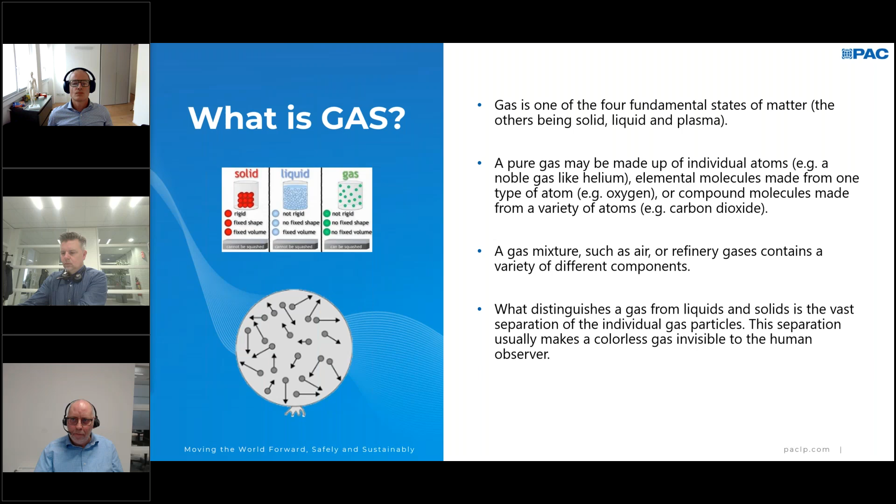So that's a bit of what a gas is, one of the fundamental states of matter where the molecules move around wide from each other in a kind of chaotic way. If we look to our industry, which we call the hydrocarbon processing industry, I have divided them in 3 types: one being natural gas, one being refinery gas from different processes, and then the petrochemical gases from petrochemical sites.

If we look at natural gas, that is mainly methane with lower concentrations of the other alkanes in there, and maybe some low concentrations of nitrogen or carbon dioxide. What is good to know about natural gas compared to the other gases is that it does not contain olefins, it does not contain unsaturated components, because olefins are made when you treat products, when you crack products. In the natural gas part, there is also the condensate, which is something in between gas and a crude oil, going up to carbon number C36 or something like that.

If we go to the refinery processes, well, you can imagine that there are a lot of different gases floating around in the refinery, and the composition may vary, from fuel gas having different components like hydrogen in there, or the hydrocarbons and so on. A typical gas, not really a gas, but liquefied petroleum gas, LPG, is a mixture of propane and butane, which are by itself gas, but if you put them in a container and increase pressure, they become liquid.

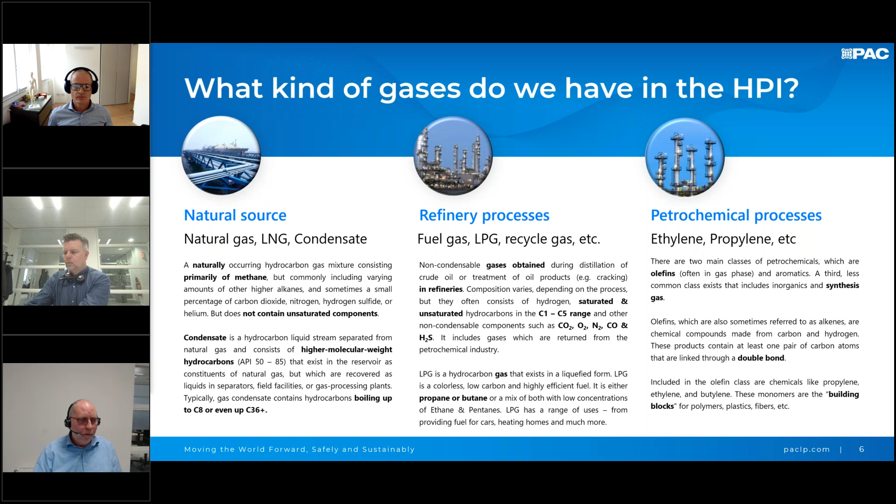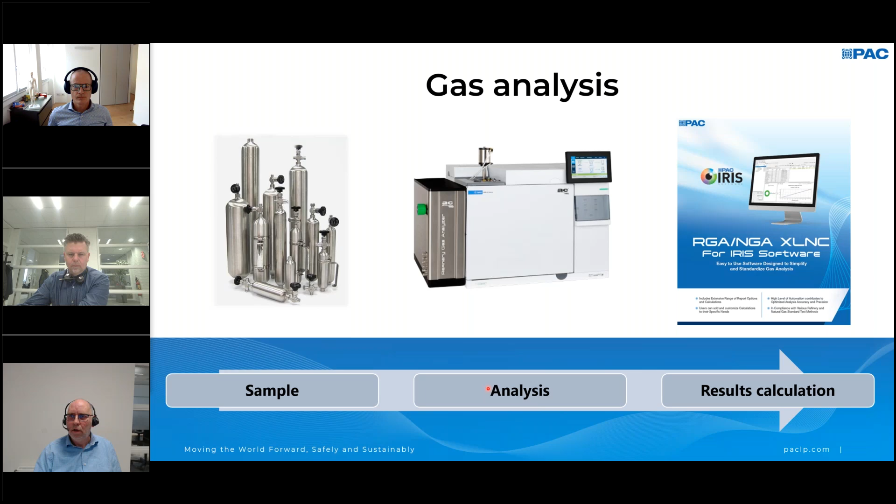If we look to gas analysis, it's like every analysis done in a laboratory. You have a sample, you analyze it, and you calculate the results. That's pretty straightforward. You could say this is relatively easy because we are not talking about that many components in a gas. If you think about a gas up to C5, C6, you can talk about 20, maybe 25 components, and that's about it.

But these components have a very wide boiling point range, varying from minus 253 for hydrogen up to, if we include hexane, 69, or pentane, 35. So that's a wide boiling point range, and you may require different types of columns to separate these components. Typically, mole sieve is used to separate oxygen, nitrogen, or helium, hydrogen. Porapak, HayeSep type of columns for the separation of the CO2 and the lighter hydrocarbons, boiling point columns, and for the somewhat heavier components, and so on. So different columns are needed to separate such a relatively simple composition product.

Sample introduction is another thing. How does the sample come to the lab? What is the pressure in there? Is it a gas or a liquid like LPG? Is there water in there? Are there any other contaminants? All items to take into consideration.

And of course, like every measurement, the accuracy of it. And when we talk about natural gas later on, what's the value of that? And calculation of the results, based, for example, on the calorific value or the heating value.

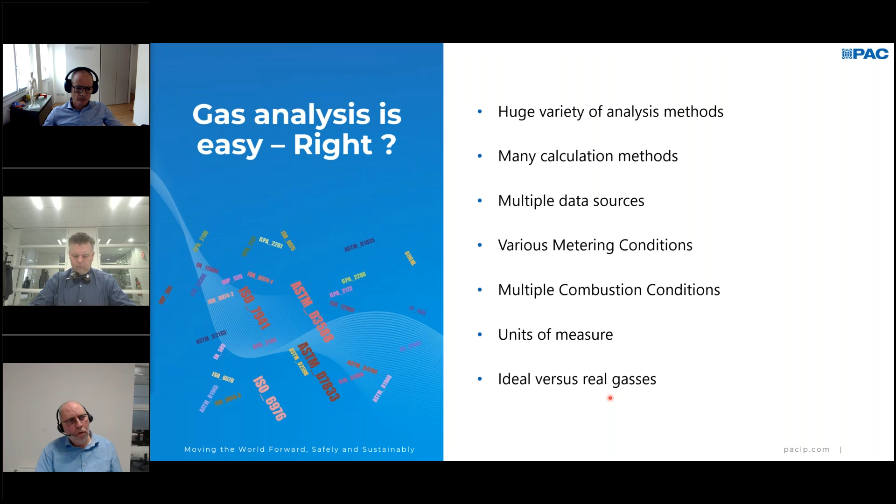And then, as already mentioned, ideal versus real gases. So all kinds of, these last two slides about gas analysis and the calculation of the results, where we say, well, it may be simple, but if you look in more detail, maybe not so simple.

If we look to why would you analyze those gases, there are multiple reasons. Typically, composition analysis is what we do. And based on the composition, we calculate the value of it because of its heating content, for example, for natural gas. I will come to that in the later presentation. If you look to a refinery or petrochemical plant, with the fuel gases used or the components being gases being burned, the CO2 emission is important to measure, to report, because of different protocols in place.

And of course, you have the process and quality control. You want to know for your LPG, is it meeting specification, or how to optimize my process. And then more on the purity measurement for the, let's say, petrochemical part, also for process optimization, for catalyst saving, etc.

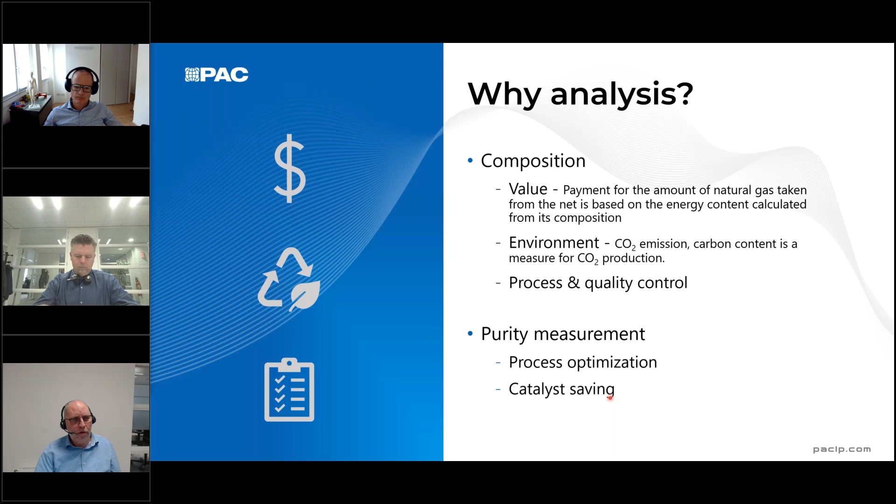If we take a closer look to natural gas, used in a lot of places in our world, from power generation to cooking to warm our house with central heating. Here in the Netherlands, we have our natural gas grid, and we use a lot of that gas to heat our houses. Or you see a lot of examples over here where natural gas is used even as a feedstock for petrochemical or fertilizers.

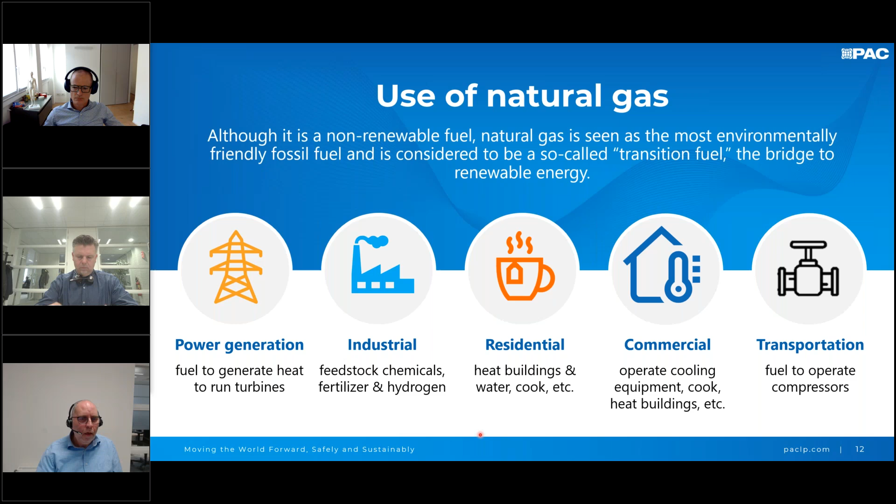And if we go to the value of the analysis of that natural gas, that's typically based on the calorific value, because the gas is used to burn and to generate heat, and the amount of heat is of course related to the composition, and that is where the price of the gas is based on.

And when we talk about natural gas, we talk about large volumes. It's millions of tons going around the world, and you can imagine that a small difference in the calorific value result may end up in a huge difference in dollars at the end. And the criteria for analyzing and calculating the calorific value is based on the error or the bias that could be in that analysis. So good accuracy, precision, reproducibility in the composition analysis, of course, of great importance.

If we go to a refinery, this is a schematic diagram of a typical refinery, a pretty complex one, I would say, but there are many places where you could measure or should measure the gas. I've highlighted them here with the blue dots. There might be more even. And here just some examples of typical products when you talk about the FCC overhead or the fuel gas or the LPG, you name them, all different places for either process optimization or maybe even quality control.

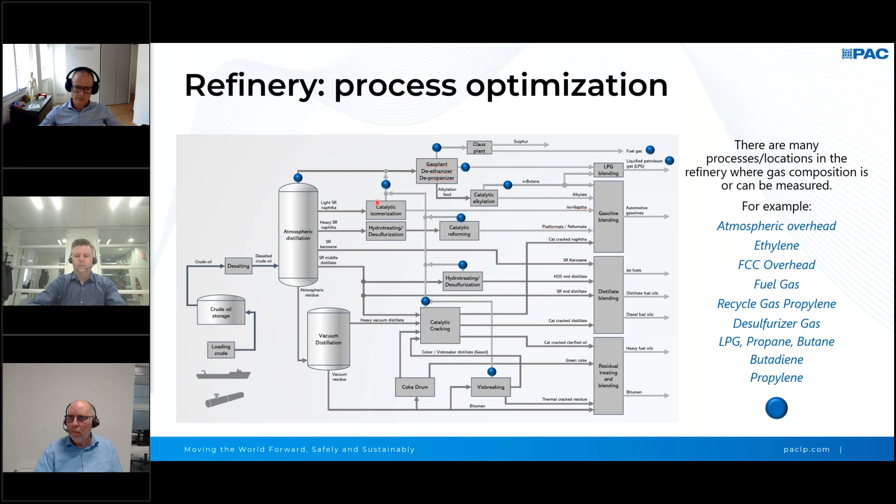When we talk about emission - in 1997, a protocol was adopted during a summit in Kyoto, Japan, about reducing greenhouse gas emissions. Greenhouse gases like CO2 and methane may go out of the chimney because you burn gases - that's an emission. If you want to reduce that amount, you need to know how much you emit, based on what gas you use to heat your systems. So there's a need for monitoring the composition of fuel gases, described in the protocol, along with the need for analysis. You can trade those values, etc. That's too much detail to go into now, but the conclusion is there's a need for measuring composition to reduce greenhouse gas emissions.

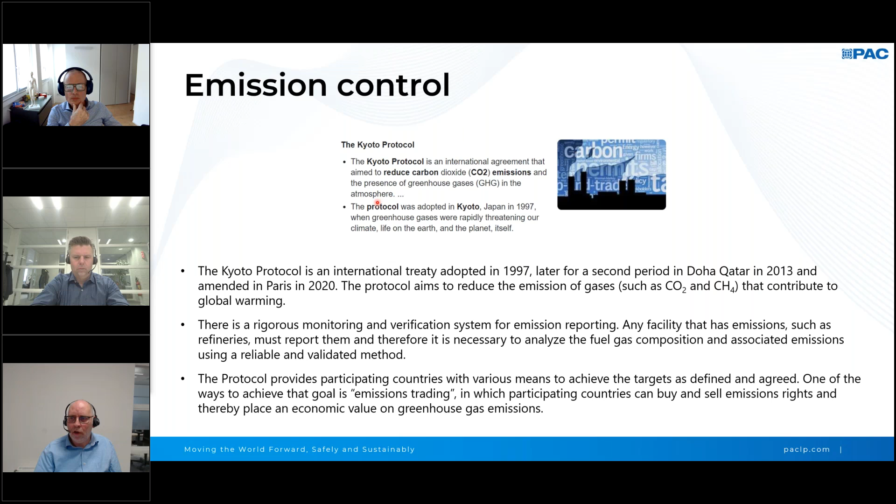Another reason is product quality assurance. If you want to trade LPG, you want to know its composition, done according to certain methods. If we all do it the same way, there's no dispute about how it's done. But using different methods might give different results. So standardization comes into place, with methods describing how to do it and mutual agreement to follow that procedure. These are just a few examples of why you would analyze gases and calculate things like heating value or calorific value from those results.

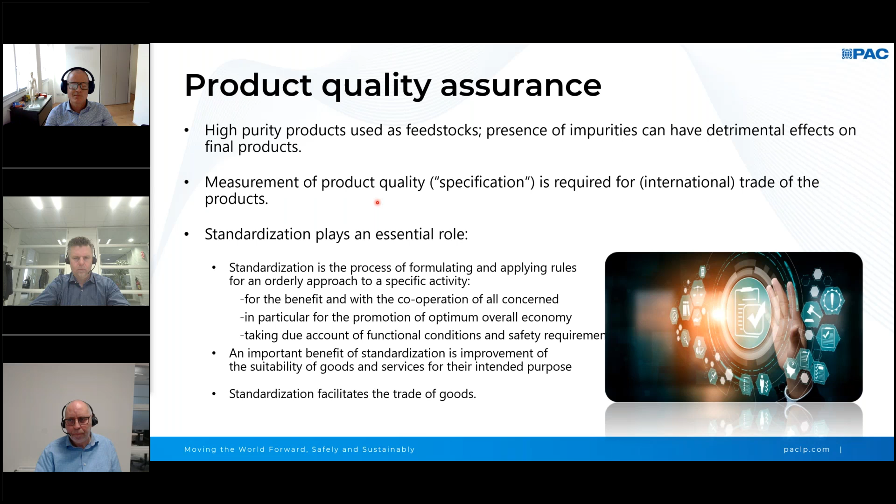Let's have a look at the instruments, the analyzers, that PAC, AC Analytical Controls, offers for gas analysis.

An overview, maybe not complete, but the main ones divided into three areas: natural gas, refinery, and petrochemical. For natural gas analysis there are many methods, like ISO 6974 or the GPA method - the Gas Processors Association has different methods. ASTM has methods, and we have some in-house analysis, all for composition analysis of natural gas. For refinery gases, we have the refinery gas analyzer, our high-speed RGA, and the LPG analyzer. The high-speed RGA, which I'll explain more later, is a very versatile analyzer able to analyze all the different gases going around in a refinery. And of course, the LPG analyzer is dedicated to LPG composition.

If we look at petrochemical, there we talk more about impurity analysis - ethylene, propylene used for polymerization - and any impurities may affect the quality of polymerization, resulting in different polyethylene or polypropylene quality. Many methods here too, which I won't touch on right now. We're going to focus on the ISO 6974 3-channel AC natural gas analyzer and the AC high-speed RGA for refinery gas analysis.

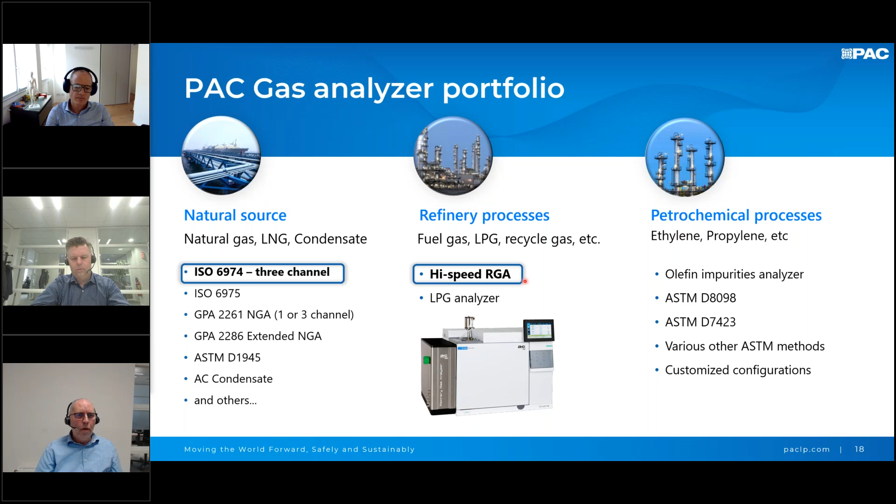So if we look at ISO 6974, that's an ISO method consisting of 6 parts off the top of my head, where the overall title is the determination of mole fractions and uncertainties of natural gas components by GC. So it's about analyzing the composition of natural gas and how accurate that is done.

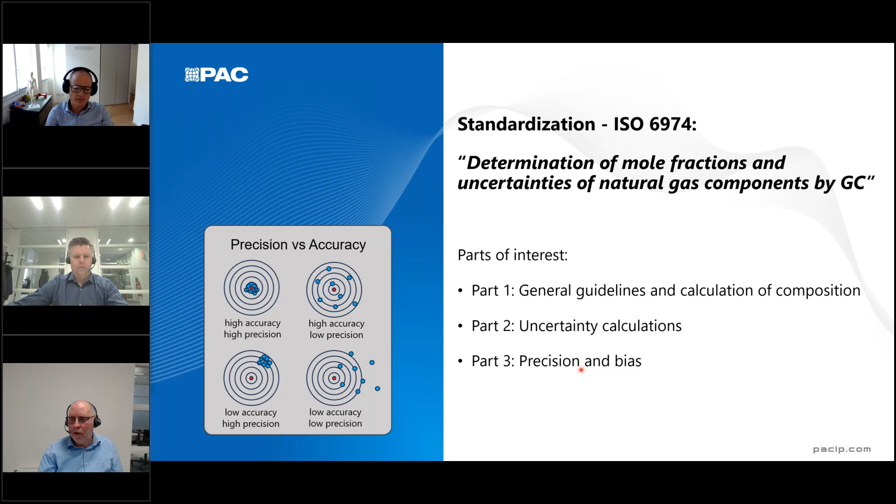This method has 6 parts: part 1 is general guidelines, terms and definitions, etc. Part 2 is about uncertainty calculation, which I'll talk about later, and part 3 is about precision and bias. That part was changed in 2018, where an earlier version described how to do the analysis - which columns to use, how to set up the instrument detectors, etc. - using packed columns, very descriptive in how to do the analysis. In 2018, with the update of the method, it changed to: regardless of how you do it, as long as you do it very precise and accurate - so no criteria on the hardware, but purely on performance.

That gave AC at that time the opportunity to develop a natural gas analyzer offering much better precision than before, because we could use our own type of columns, our own design, etc. That design is what we see here - a 3-channel analyzer where we analyze the hydrocarbons C3 and higher on an FID. We have a separate channel using a TCD for air, methane, CO2, and ethane, and then a 3rd channel for helium, hydrogen, oxygen, and nitrogen. These last two obviously use a thermal conductivity detector.

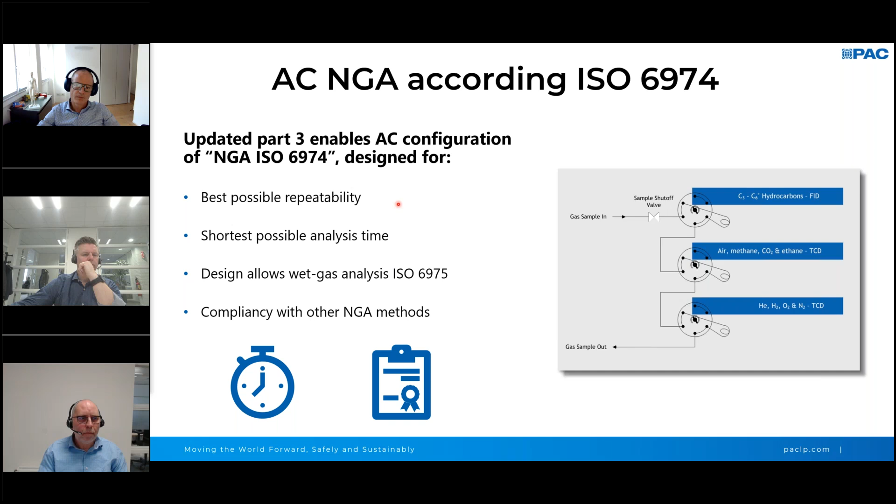3 channels, 3 chromatograms, obtained simultaneously. Channel 1, 2, 3, as you see over here, where you see your hydrocarbons, carbon dioxide, ethane, and hydrogen sulfide, and the helium, hydrogen, oxygen, nitrogen, and methane, where the hydrocarbons are separated on a capillary column in the GC oven, and the other components are separated on micro-packed columns in an isothermal oven.

That isothermal oven is a big contributor to the precision of the analyzer. I'll show you later, but we are much better than what the old method was stating. Having your micro-packed columns in an isothermal oven means there is no change in temperature, and therefore the stability of that separation and the quantification is much better.

We have an analysis time of less than 10 minutes, as you can see here, and we do a backflush of C6. If you want, you can take that out and extend your analysis, where C6 and maybe traces of C7 could come out at a later stage.

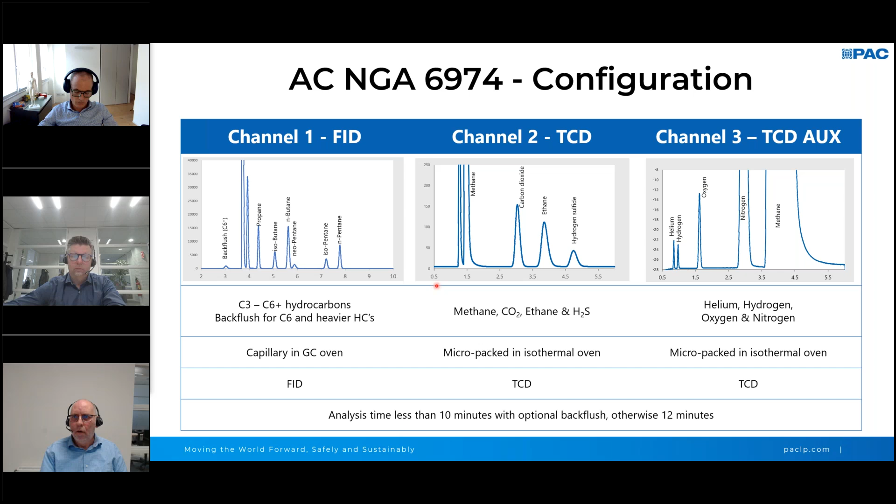Looking at the performance, the ISO method gives you a requirement on the standard deviation, as listed over here in blue, where the performance of our system is shown in orange. You can see they're all much better than what the method is asking for.

And here on the right scale, you see the typical concentrations of those components. Just to give you an example, methane, the standard deviation is almost 10-fold better than what the method is asking for, which obviously has huge consequences for the precision and the uncertainty on the calorific value as well, which we'll see later.

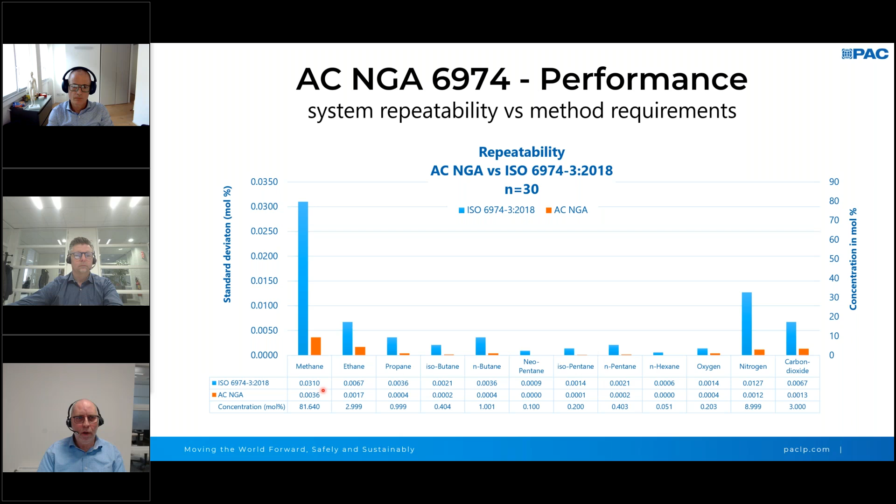Detection limits, we go down to 100 ppm for the inerts, so to say, in the methane and ethane, where the heavier hydrocarbons go down to 0.1 ppm.

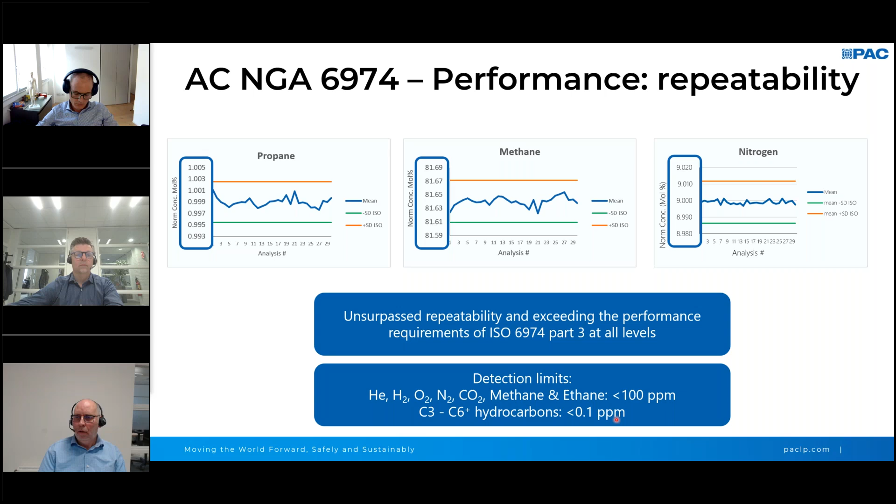If we go to our next analyzer, the versatile high-speed RGA, a very broad sample scope, analysis done in 6 minutes. Cost-effective design means that it's again a 3-channel system, as we'll see, allowing you to run single channels as well.

Proven compliancy, we'll see the performance of it, and it comes with our latest software, which I will demonstrate at the end of this session.

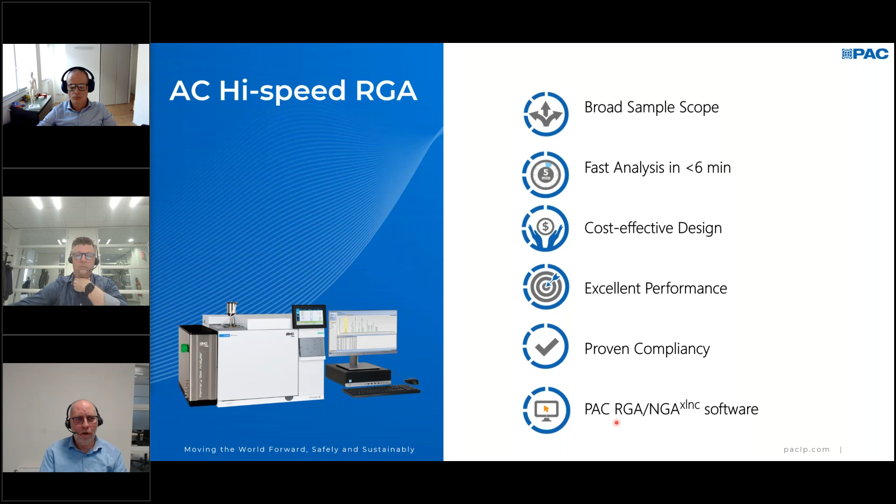Kind of similar to our natural gas analyzer, 3 channels, 1 for helium hydrogen, 1 for the hydrocarbons, and 1 for the inerts.

3 channels working together simultaneously, or you can say, you know what, I'm only interested in hydrogen, and then you can do a 2-minute analysis where you only use this channel. So versatility altogether, just 1, like the hydrogen over here, or maybe just LPG composition on the hydrocarbon channel.

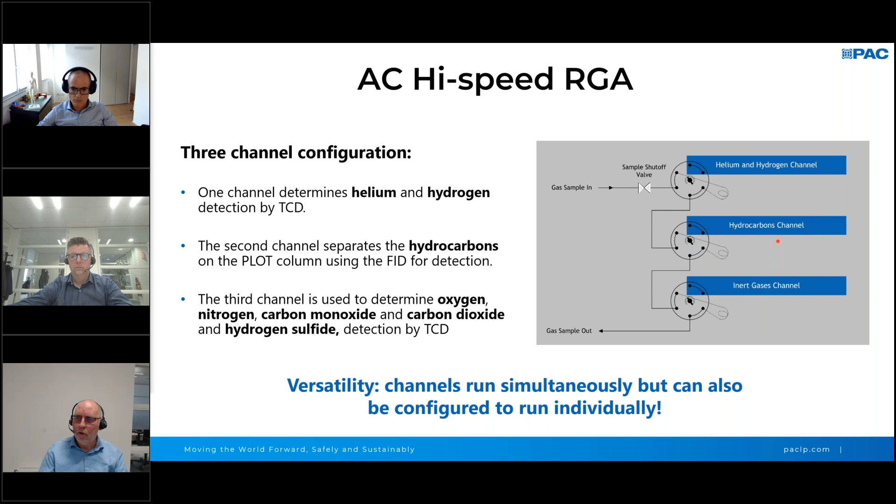Some chromatograms as produced by the RGA, hydrocarbons detected by an FID separated on a PLOT column. Here you see the analysis of hydrogen, and here we see carbon dioxide, H2S, oxygen, nitrogen, methane, and carbon monoxide.

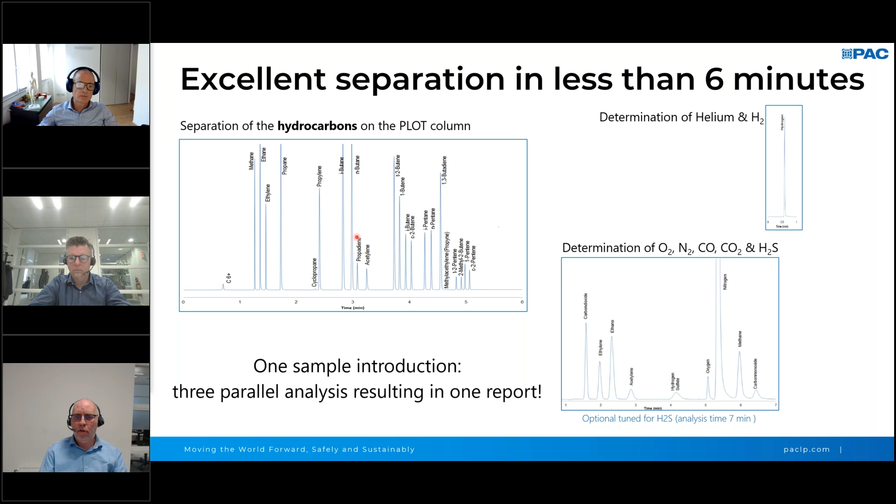That's the standard setup, but with that same hardware, we can also run different methods. Same hardware, different methods on the same instrument, without any hardware change whatsoever.

If you leave the backflush out on the hydrocarbon channel, you can also analyze BTX. So you don't backflush, and you see we analyze up to orthoxylene if you really zoom in.

We have the option to analyze H2S and COS, not at ppm level. For that, you would need a different system, our Sense2 chemiluminescence detector, but on the TCD, you can still measure down to about 0.1%, something like that.

And LPG, just the hydrocarbons. For that, optionally, you can also add a liquid sampling valve for introducing the LPG as a liquid, where typically all gases are introduced as gas.

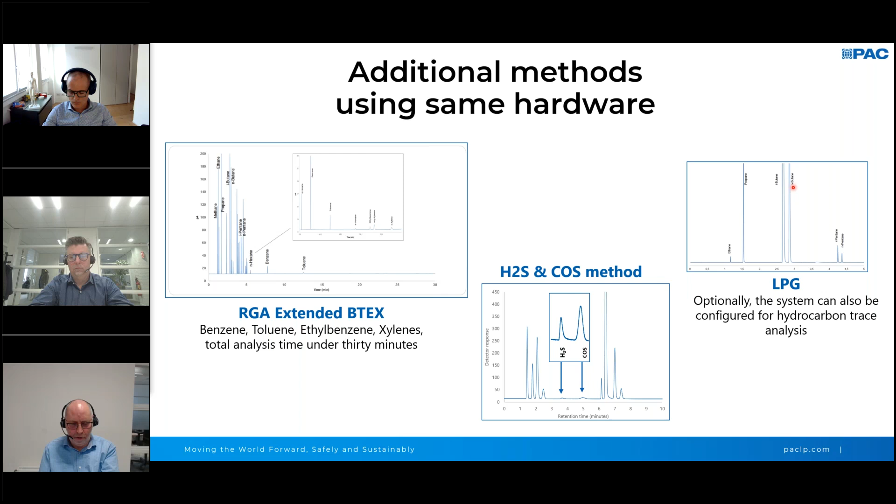If we go to the specifications as listed here in the method compliancy, different ASTM methods, 1 ISO method actually, EN methods, and an IP, DIN, UOP method, all describing refinery, some type of refinery gas analysis.

The dynamic range from 0.01 to 100 for the hydrocarbons, and you can read the rest here for the inert gases and the H2S, where we have a repeatability of less than 0.5% on the peak area.

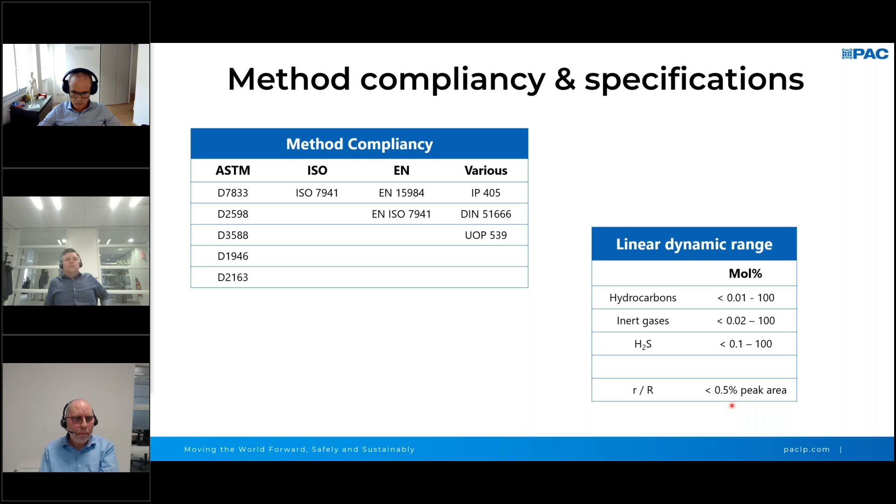One of the nice features, and I will just highlight 2 of the features on the RGA, is that we control the sample introduction with the help of a sample shut-off valve. If you look to what goes into the columns, it is the content of the sample loop on the gas sampling valve. And the content of the loop are the molecules that you introduce. So you can go back to the ideal gas law, where PV is nRT, where the volume of the sample loop is fixed, the temperature is fixed, R is a known value, and the pressure directly relates to the number of molecules in the sample loop.

So what we want to do is to do this as repeatable as possible, and we close the gas sample going into the sample loops once it's flushed enough, and then you stop the flow and you allow the pressure inside the loop to go to atmospheric pressure, and then switch the valve to introduce the components into the system. So having it always at atmospheric pressure improves the repeatability of the system.

You can of course do that manually, but operators may act different, etc. And you may forget to switch, or you switch too early. In this way, it's all automated, and that's the result then of a good repeatability.

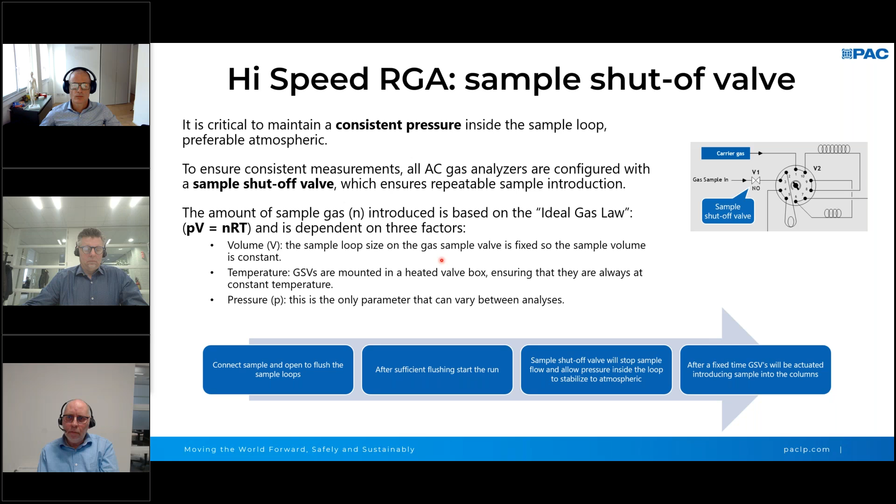And typically that was done in the past by taking the column out, put it in another GC, warm it up for a few hours, put it back in, etc. A very cumbersome and time-consuming procedure. What we have now done, we have built a conditioning in there. It has its own heating, and you can, while the column stays in the system, for a couple of hours, condition the column using nitrogen as carrier, because that improves the conditioning.

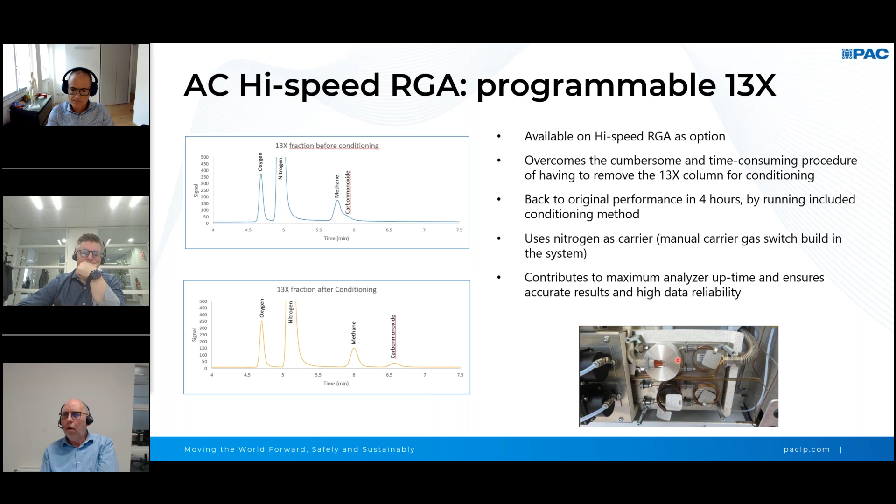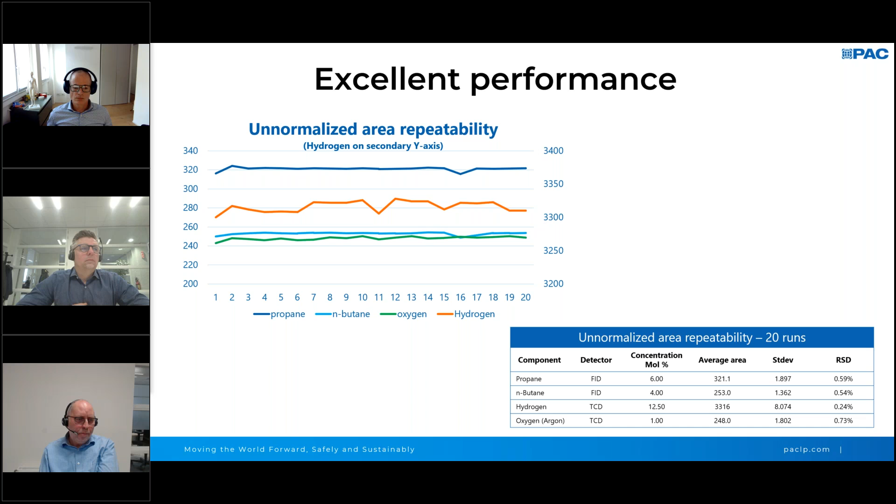To set up the analyzer, and as you hopefully know, PAC guarantees their analyzer for the application you have bought it, so that's the application guarantee. We calibrate the system in our factory using certified calibration gases, and we ask during the installation to have a certified gas available so that we can calibrate and validate the system performance. We can offer you those gases. If you already have them, you can use your own, of course.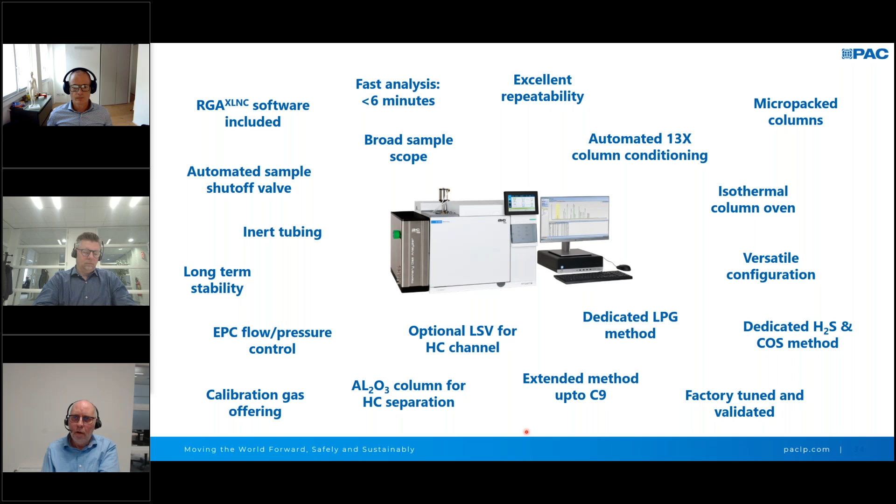We make life, I would say, very easy with the installation by, upfront, before we ship the unit, setting it up, testing it, calibrating, and validating it, so that once it comes on site, it's kind of ready to go. And the only thing needed to be done is to recalibrate. That's obviously needed because it's reinstalled, so you always need to recalibrate.

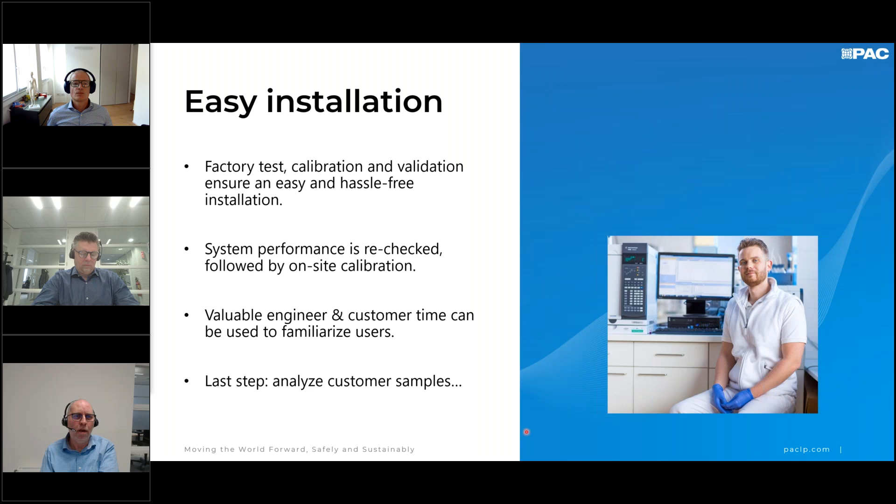We check it, we familiarize the user with it, and then we can say, well, when that is done or during the familiarization, come with your samples, and we help you to analyze the first samples. That is typically done within 2 days. So very easy installation. So far on why and how to analyze gases, natural gas and the refinery gases.

For the results calculation, we have recently introduced a complete new software package, which we call RGA/NGA XLNC, and it's part of our IRIS software, and I will show you later on. Why would you need such a dedicated software? Well, there are a couple of things you need to pay attention to when you calculate your results.

You need, of course, to know how your instrument was configured. Is it 1 channel? Is it 2 channel? 3 channel? You need to calibrate it, single level, multi-level, 1 gas, multiple gases. We need to look at what product was analyzed. You may need a different report for one product than another product, or you can expect different components to be present. We may need to follow a method. So the method compliancy, is it the ISO 6974, or is it another method, one of the RGA methods?

Do we want to report at 20 degrees or at 15 degrees or at 1 bar or at what temperature, etc.? All things that play a role in calculating the final results of the gas analysis. And as you can see here, our software incorporates all these items as just listed. And for each bullet, I will show you 1 or 2 screens from the software, and later on I will show you the live software.

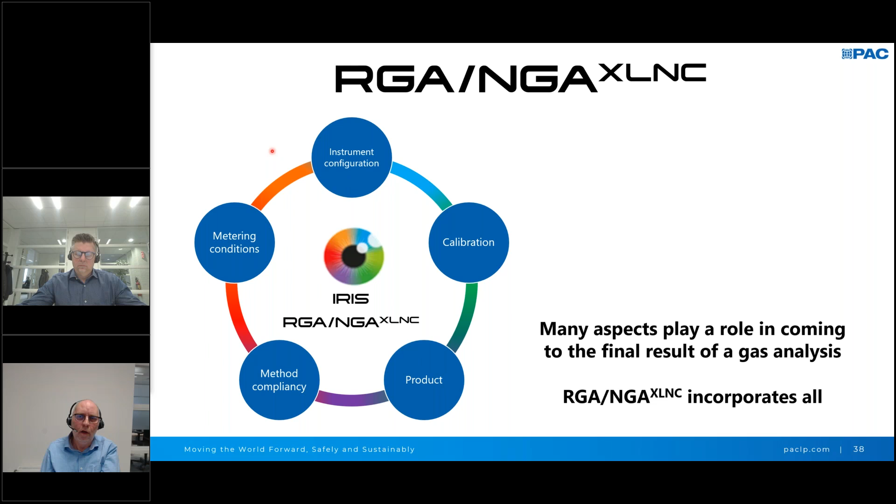So if we go to the instrument configuration, you can define the hardware, how many detectors are used, etc. And like here, what's the name of the detector? Do you want to automatically, after the analysis, process your results? Do you want to bring them in the system? Because it's good to mention, for analyzing the sample, we use the standard chromatography data system, typically OpenLab or ChemStation, but OpenLab is at this moment, I would say, the standard. After the analysis, the sample can be automatically imported in our database, in our software, and results and composition are calculated automatically.

The calibration, as I mentioned, you can have just 1 calibration gas with all components in there. You may have 2 calibration gases, as in this example over here, where we have 2 gases, one with H2S and methane, as we typically offer it, and the overall RGA calibration gas with all components in there. For each gas, you enter the values in the software, and you can even upload a copy of the certificate, and you tell the concentrations for the 1, 2 or 3 gases you use.

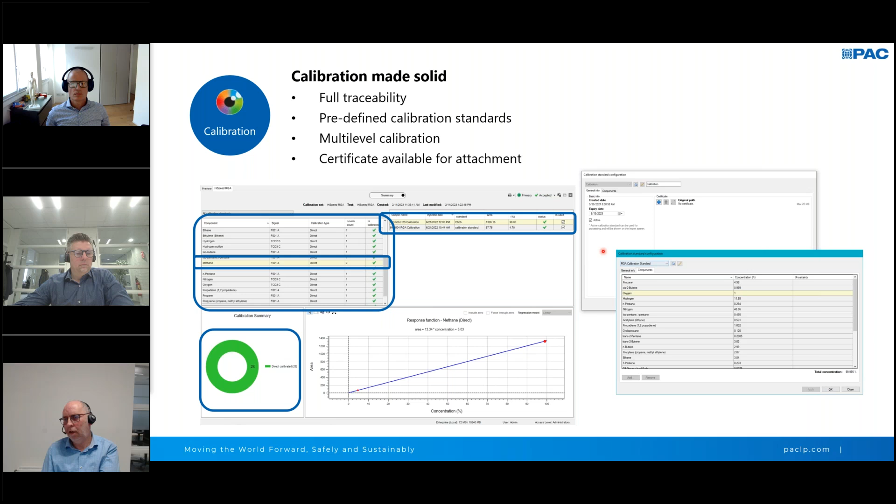The products, you can analyze, of course, different types of gases, and each gas may have its different requirements in terms of reporting volume percent or mole percent, or you want to unnormalize the results or whatever. And you can enter those target values of what it should be for your LPG. For example, your butane may have maximum 40%, whereas your propane has a minimum value of 40%. And your unnormalized results should be between 96 and 104. If you analyze the sample according to this requirement, then it will tell you whether it's out of spec, so to say. And that's the same for the different calculations like shown here, the vapor pressure or the motor octane number, different values that you can enter there.

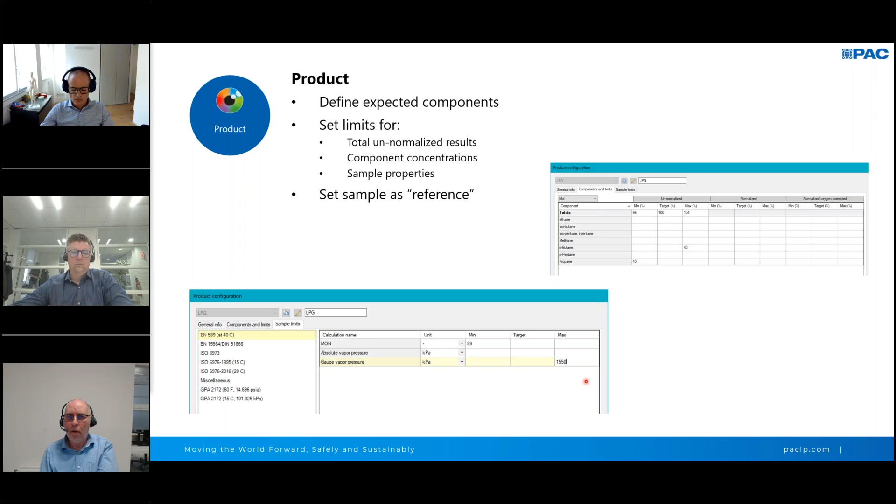And those values are used to check your results and tell you whether your sample is okay as per the parameters you have entered. If you look to the methods, well, there are a load of them. ISO methods, EN methods, you name it, listed over here.

And the software includes a lot of calculation of the various properties shown over here. The molar mass, the inferior or the superior calorific value in mole or mass, or the carbon content, or the heating value with the units as listed over here at the various temperatures. And that is very important to keep in mind. When we go to the reporting, you can report at different temperatures, at different parameters, etc.

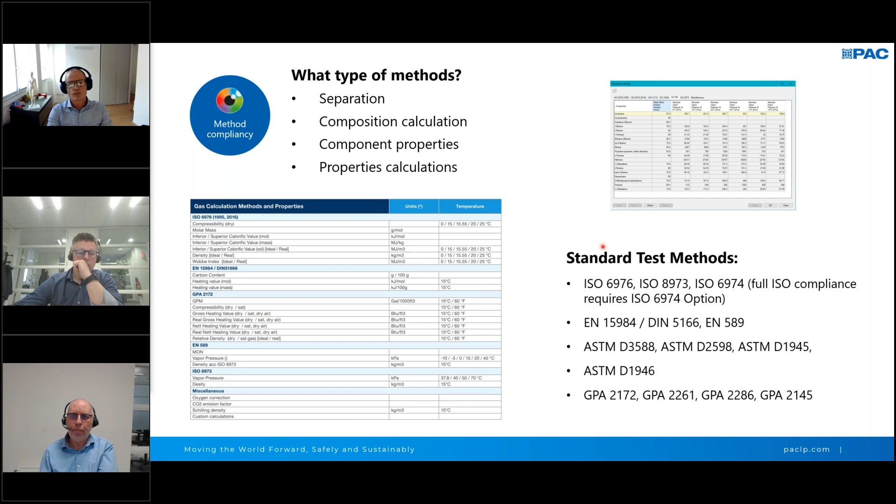So these are the methods all included, and over here you see for the different methods I will show you in the software the values of various temperatures, etc. And this data is used for the property calculation at the end.

Then we have different metering conditions, temperature, pressure, and they can be used. You can set different temperatures for the different methods. You can change that, you can optimize that yourself. Data is in the database and will be used depending on your setting. The units you can choose yourself as well. Here, kilojoule per mole, or joule per mole, or BTU per mole, or kilocalorie. You can define the precision and whether you want to use it, yes or no.

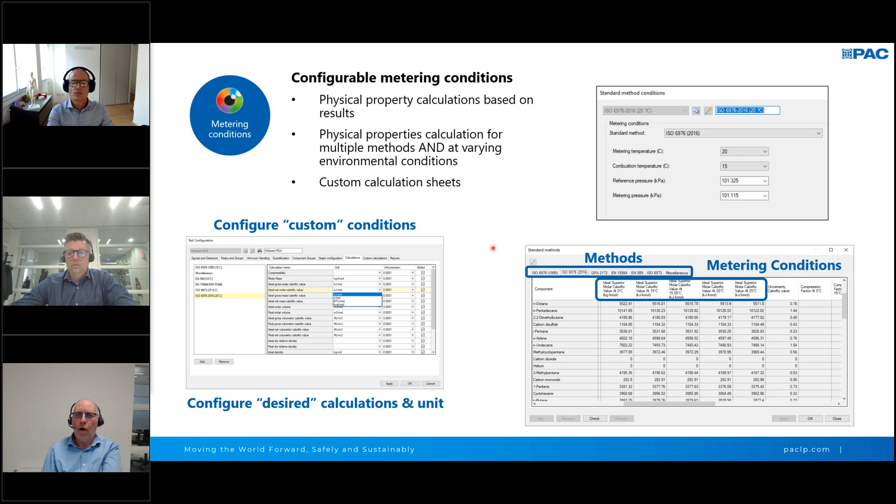So these conditions, these settings, you select once you define a product, once you define a method, and that will then be used to calculate your results and will be shown in the final report, like just an example over here. Components, the retention time, and I've selected only mole percent and mass percent, normalized, but that could also be unnormalized in mole percent or volume percent, whatever you like.

The metering conditions chosen over here, and here you see some results from different calculations with different units. And the different units and the different metering conditions, you can set that in a report. You can have, let's say, the molar calorific value reported at different temperatures by simply selecting it twice and selecting different conditions. And what you get in your report is drag and drop, like we are used to with this kind of report setups. So far about our standard RGA/NGA XLNC software, and I will show you it live later on.

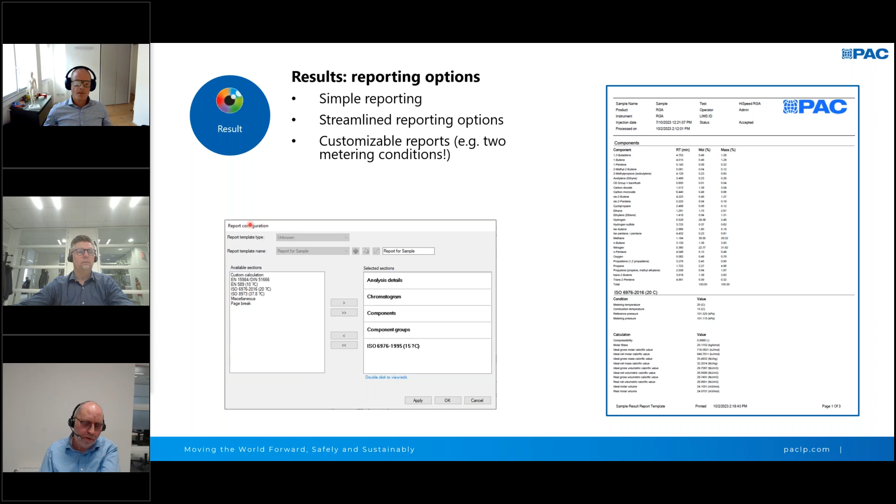We have the option to add something to it, and that is the uncertainty, because for natural gas, we make the statement, knowing your uncertainty gives you a certainty. It may sound a bit weird, but if we go to what we talked about, that your natural gas analysis is traded based on the energy content, you can imagine that the more accurate you do that, and if you know your accuracy, your uncertainty, you know what to ask for in terms of pricing.

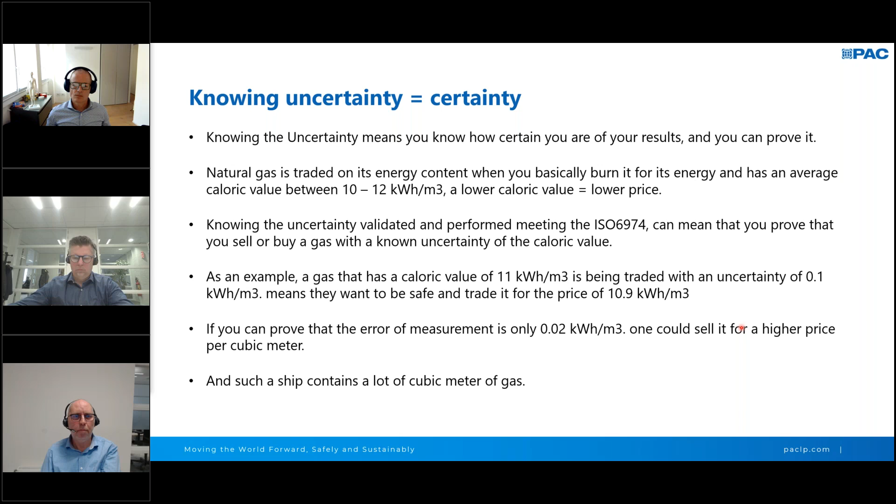And the ISO method, part 2, as I've mentioned earlier, describes the uncertainty and how to calculate the uncertainty based on the analysis done. And that involves quite a lot of measurements and calculations. First of all, it wants you to analyze calibration gas at 7 levels, and for each level, a minimum of 10 repeated analyses. So that's already 70 analyses by itself to calibrate the system.

In addition, they advise to analyze a working measurement standard. That's a kind of check standard stored with that calibration or linked to that calibration, and such a working measurement standard can then be repeated at the moment you analyze your sample. And those two are then compared, and it tells you whether your system is performing well and you can trust your sample analysis.

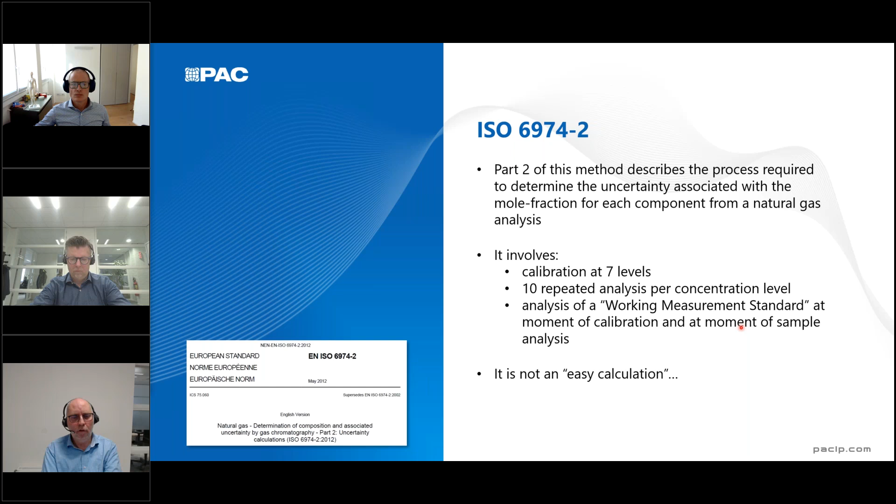If you look to the methods, it's quite a few pages of formulas, etc. It's not a very easy calculation. And typically that is done using, for example, Excel. And we still have that in the field. Excel sheets where you need to manually drag your results into, and how to get it out and how to automate this, those are all challenges you may have with using Excel.

And an important one, for example, is the traceability or the flexibility in the reporting. Well, you know what, with that nice ISO module that we have now available on our software as an option, it deals with all these kind of items. And I'm gonna highlight them in the coming slides.

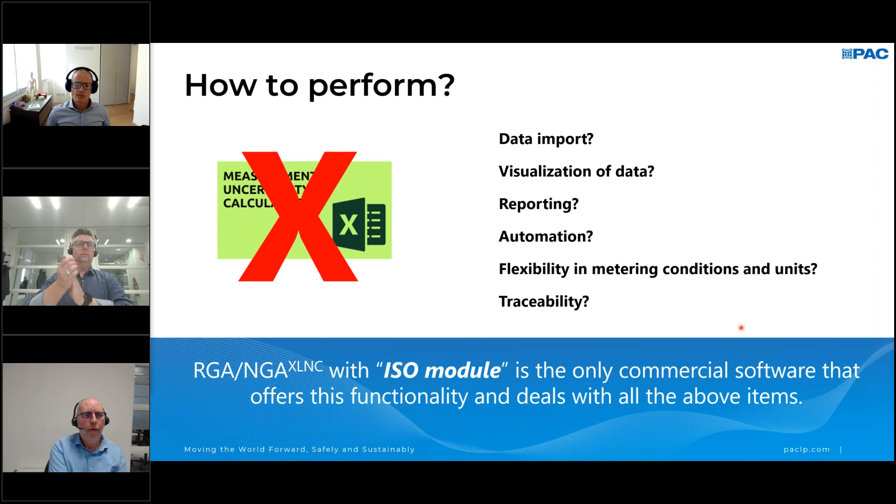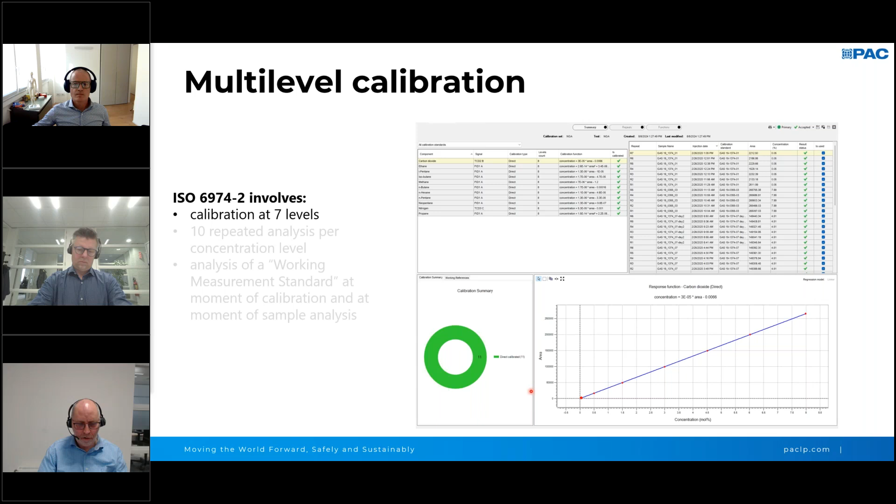Here you see a calibration, multi-level calibration. 1, 2, 3, 4, 5, 6, 7 points for, in this, carbon dioxide as an example. And it gives you the calibration function. It shows you it's doing perfect. You need to do multiple analysis. Well, in my example here, I only have 6, but you see for each level, we have done multiple analysis. It's giving you the different individual results.

And from that, it shows you how the results deviate from mean for every individual value. And you can indicate and exclude individual results if you want to, or if the software tells you, or better said, the ISO method tells you, you have to exclude. And each point here is represented in this graph over here, where you can see how it deviates from the mean value. So this is our calibration just for one level, but the multiple analysis. So that's the next topic.

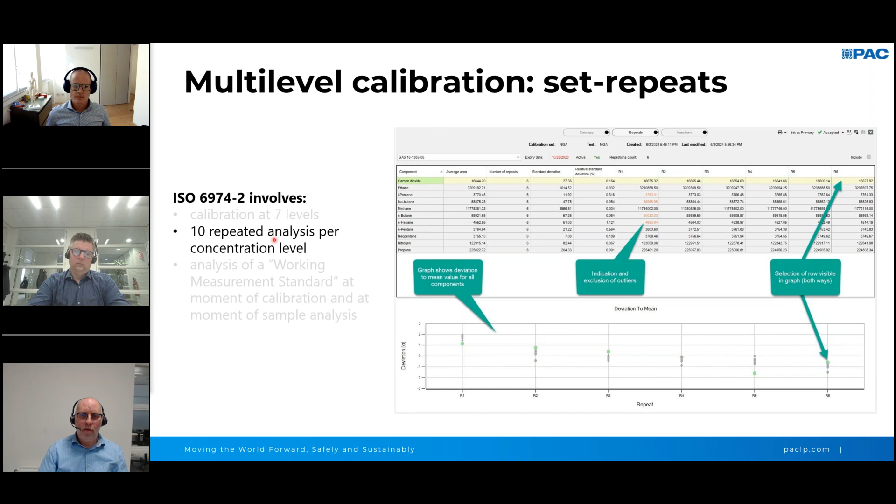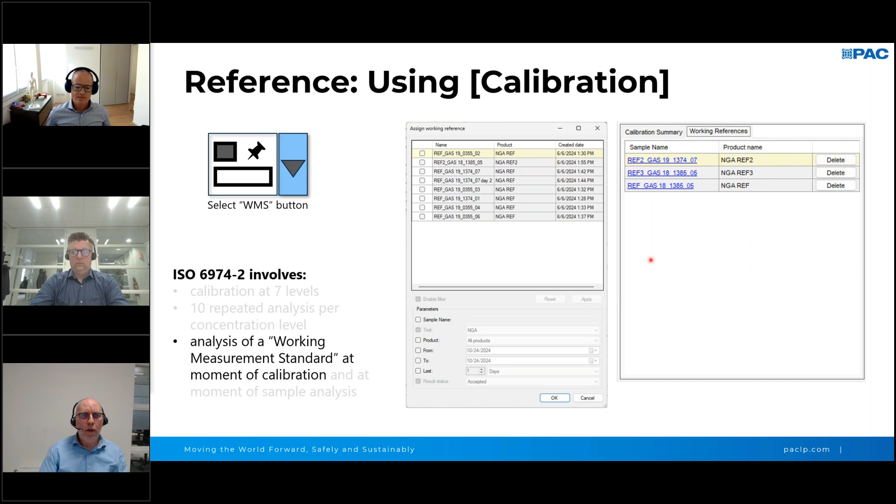And then we have included the working measurement standard. Let's say the check standard. You can do multiple of them, and you see them over here. You can select which one you want to use. And when you go to your sample analysis, you select the working measurement standard or working reference standard, whatever names you want to use, and use that in your calculation.

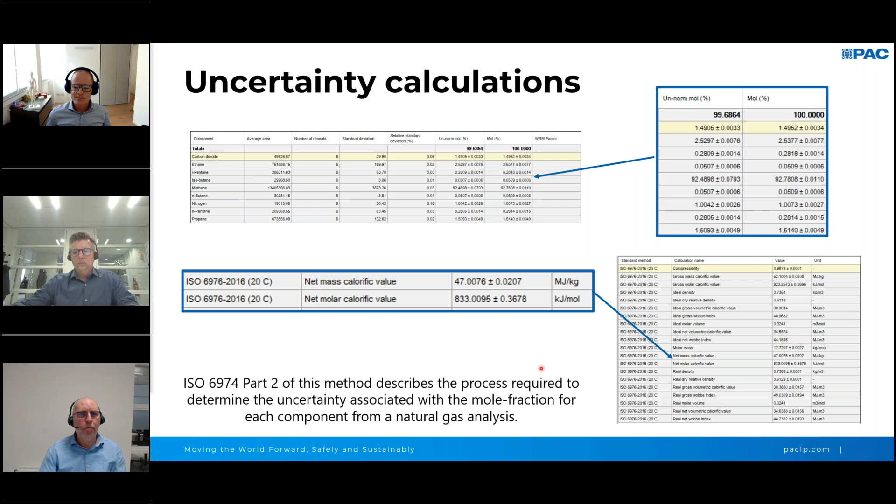And this helps you in proving to your customers, well, this is the quality of our natural gas, and we have analyzed it with this precision according ISO 6974 Part 2. So that option, additional feature on the software, complies with the methods. It contains all the metering conditions. It's automated, so your results introduction, the calculation, etc., is all automated, and it validates the various functions. There is the working reference material correction in there. It shows the sample repeats and the limits for that.

And a nice thing about it is also the option to do a pressure correction. So if you have the ability to measure the atmospheric pressure at the moment of sample introduction, you can even include that in the calculation, which will improve precision even more. Just in a summary, some additional items about the software. Like I said, the pressure correction.

Some methods may ask you for oxygen correction. If air was introduced during sample introduction, it can be calculated out by using the oxygen correction. Some methods ask bridge calculations. The peak identification, I will show you, is easy, drag and drop, and will identify individual peaks or groups. There is an unknown handling, and then of course the uncertainty and the error propagation calculation, the sample repeats and so on, as for the ISO 6974.

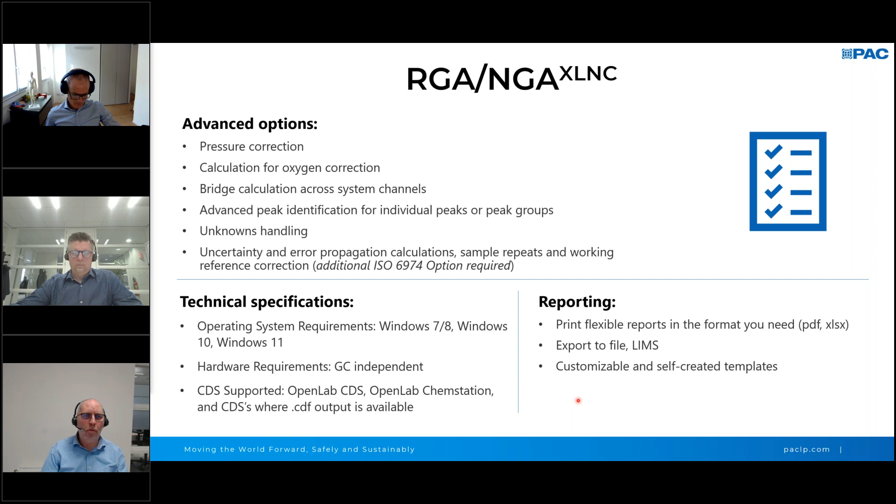Brings me to the last slide of my presentation. So as a summary, we offer you a complete portfolio of gas analyzers for refinery gas, natural gas, petrochemical gases, LPG, etc. And they come with a piece of software which gives you all the extensive reporting options and calculations. And if you have the ISO 6974 option, then it also includes the uncertainty. And the title of the presentation was Gas Analysis is Easy, and I think we can answer that by now. Yes, it is, if you use our PAC software and equipment.

Let me now, if that's gonna work, show you some of the software, or maybe do that first, see if that's gonna work.

Okay. Okay. Arjan, we don't hear you. Arjan is asking Fabrizio whether there are already some questions in the chat box. Can you hear me now? Yes, you too. Yeah.

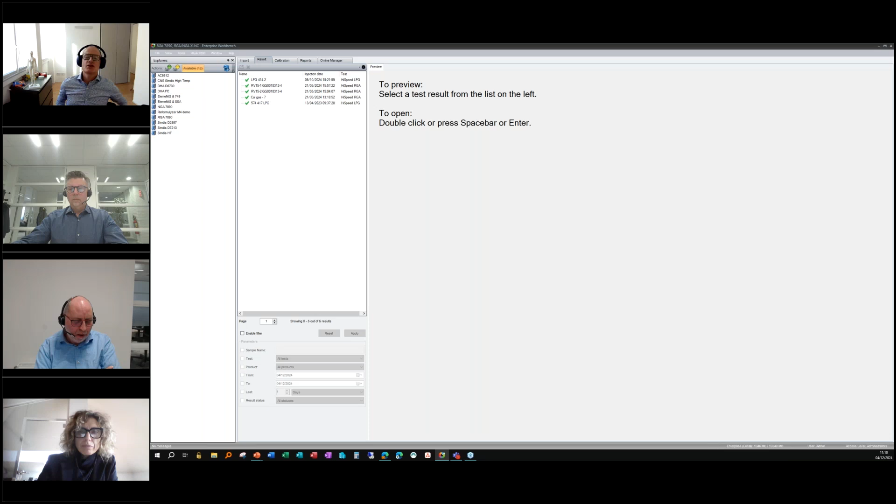Well, that's not a very straightforward question. It's about validating software. I would say the most safe way of doing that is having a result of a sample, and to prove the outcome is good, take the results of the analysis and manually follow the formula as written in the method and see if the results compare to what the software produces. That would be the most safe way.

What I know also is that people use calibration and validation gases to check if the analysis performance is good. So if you have a calibration gas, you rely on that, but to have proof, you could have another gas with a slightly different composition, maybe even from a different supplier, and analyze it to see if the values match. That would be a cross-check on the composition analysis.

The calculation results, so for the heating value or whatever you want to calculate, I would say take the concentrations as reported, follow the method, and calculate manually.

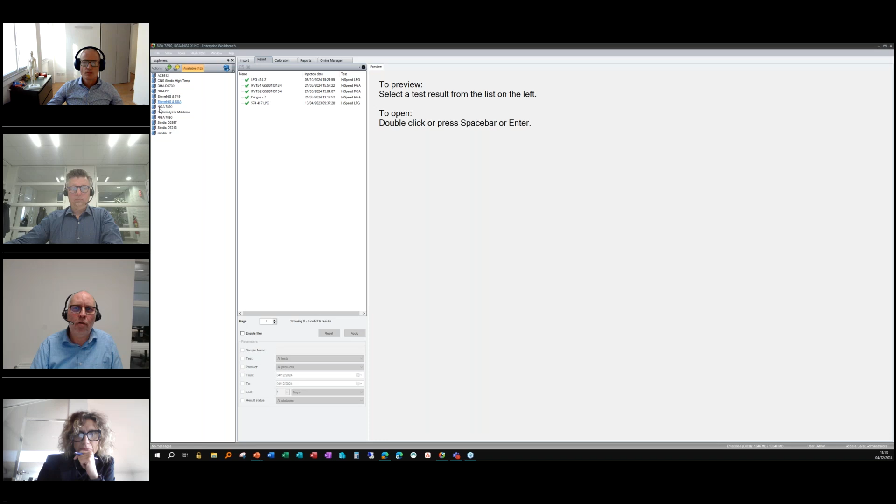Yeah, and thanks for the answer. Do you see my software screen? Yes, yes, good. So what we see here is our main screen from Iris, and I'm just showing this as well because...

So we have Iris as a platform for all our GC analyzer software packages. You see I have a lot of instruments in here, varying from a reformulizer to an RGA and various SimDis. Let me start the RGA software.

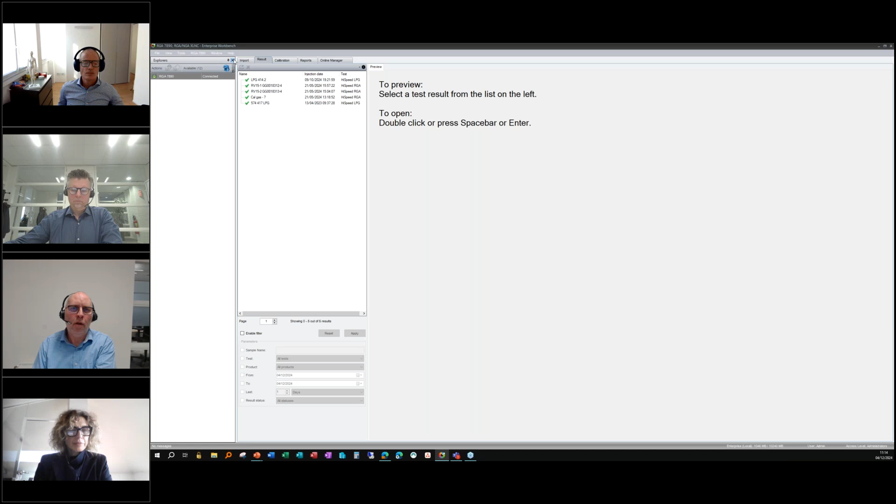And there we go. I'll close this one to have a bit more space on the screen. So the look and feel of the RGA XLNC software is very similar to our other software. Those familiar with SimDis, Reformulizer, or DHA will immediately recognize this screen.

We have multiple tabs available for the user, where the results tab shows the analysis results present in the database of our software. In my case, I only have 5, which makes it very easy. But if you have hundreds of analyses, below here you have the option to put in filters for a specific test, a specific product, or a time, and it shows only the results from that selection.

If I take one and do that over here, one click gives you a preview, and a double click opens the results. What you get, in this case, is from a high-speed RGA. I'll limit myself today to the high-speed RGA demo. You will see 3 chromatograms: the FID channel, the channel for helium and hydrogen, and the one for carbon dioxide, oxygen, nitrogen, etc.

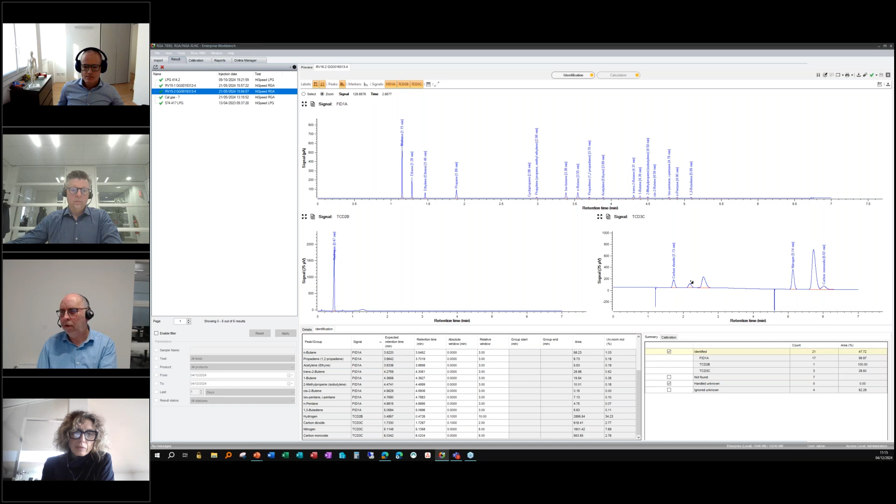I can open a second sample, and you'll see I can switch between the two, and I can have multiple open at the same time. What you see is the 3 chromatograms.

You see the labels there, and if I go here and simply click the select button, I can drag and drop. You'll see it becomes bold, and it says something is not found, so I simply drag and drop it over there, and now it's recognized. It gives you the results and the area found for the components, and the unnormalized concentration. So this is the identification part, and here you can choose what you want to see on the screen, like not-found peaks or unknown peaks, etc.

You can have different markers, you can have your signals. If you say, well, you know what, I only want to see the other two, you can switch it on or off and so on.

The results are shown here in the calculation tab, where you see your components. The unnormalized results, well, 100.77 is good. Mole percent, mass percent, gas volume percent, and liquid volume percent for each component found, and a lot of calculations selected in this case.

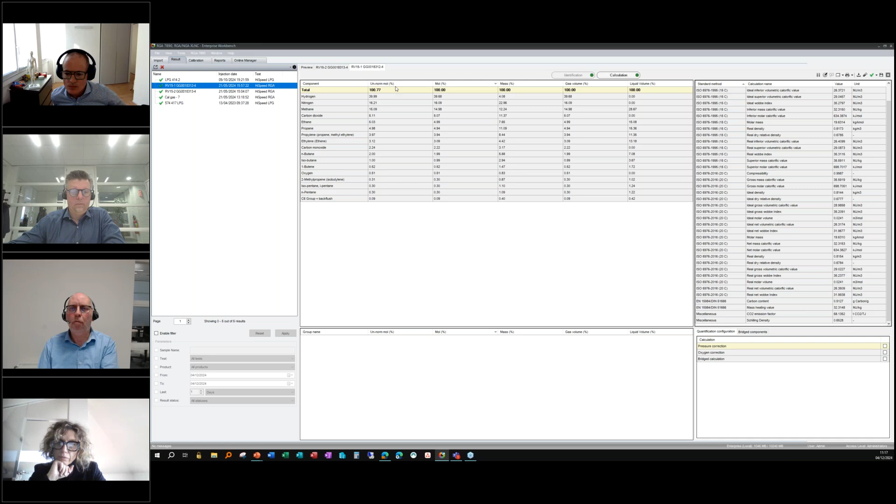So select between the identification part and the results. If you want to create a report, you go to this little button over here, and I have no clue how I have set up the report for this one, but let's have a look.

Apparently asked a lot, and with my connection, Teams connection being on, it takes a little longer in this case to load the report.

There we go. It's initializing it, and there we have a report set up in a certain way, and how you set it up is customizable.

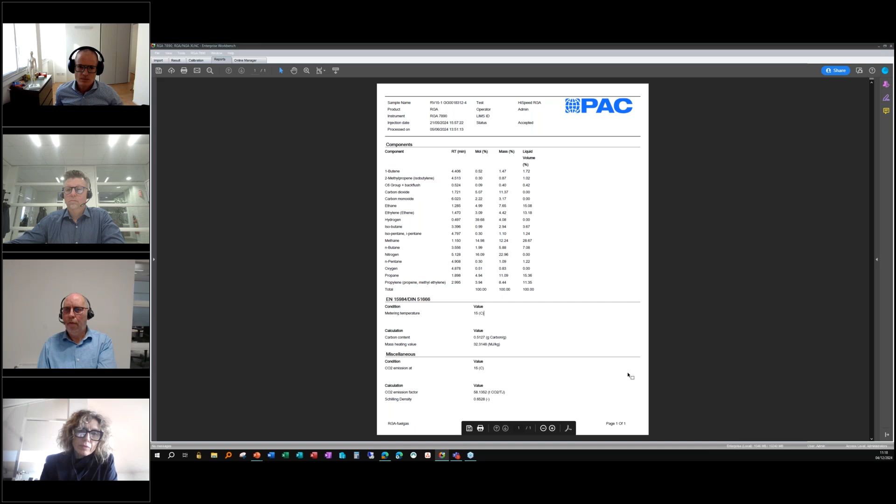So your components, in this case, I've selected mole percent, mass percent, and liquid volume percent. The metering condition, in this case, 15 degrees for the carbon content and the mass heating, and the CO2 emission at 15 degrees as well. Yep, so that is from this results.

You see another tab over here, and that is the calibration tab, where we have, in my case, a calibration for high-speed RGA, and let me open it.

And in there, I have two analyses. This one and this one.

So you get your chromatograms, you do your peak identification, etc. You do that for both, and then you'll end up with this step for your calculation, giving you the curve, whether it's calibrated yes or no, showing you per line the curve, and it shows that for all components in there, everything is calibrated correctly.

You can have different calibration gases for different tests. In my case, I have here three tests, defined three instruments, you could say. So that's on the calibration.

Let's go through the various options. The signal and detector, well, as already mentioned, that defines how my instrument is configured.

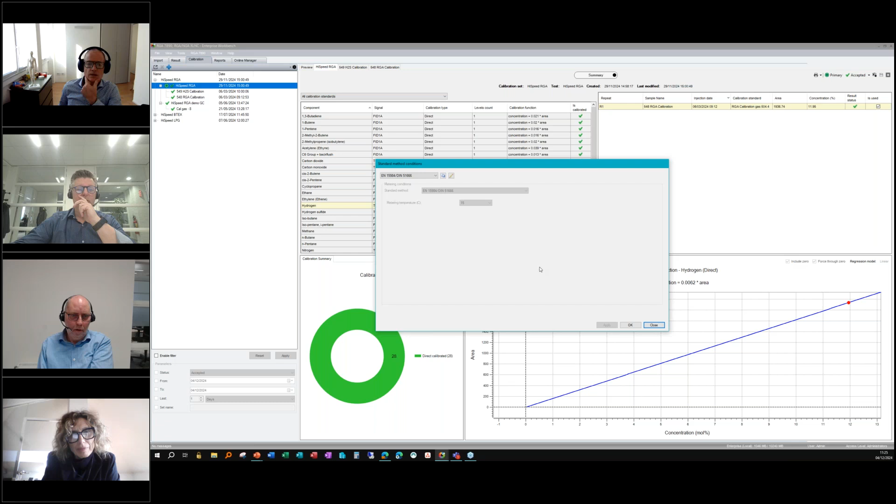I'm looking at the clock, we have 5 minutes left.

And of course, the final LIMS export option, either automated or manual, where you can set up the results according to your wishes for how LIMS would like the results to be presented, and then LIMS can pick it from a certain folder, in CSV, text, or whatever format you want to have.

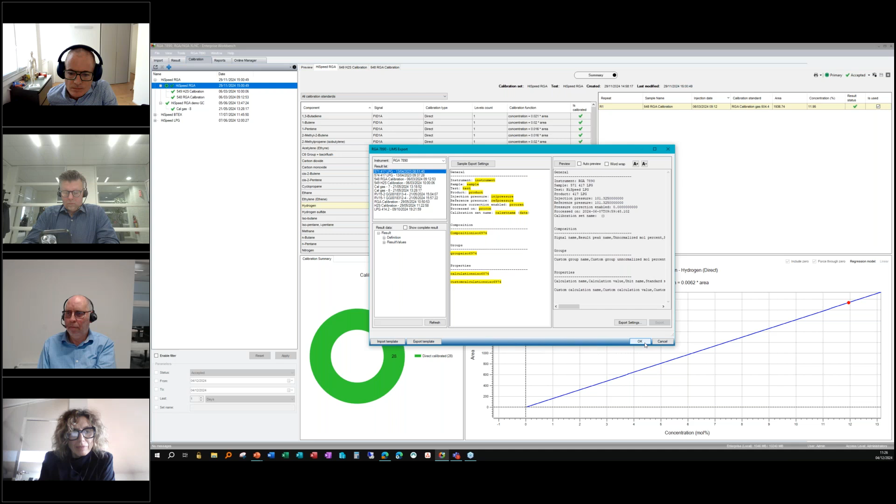Just a quick glance, definitely not showing you all the features, but at least I hope to have given you a certain feeling that there are a lot of options in terms of calculating and reporting results according to various methods.

And I hand it over, I think, to Fabrizio and Laura to see if there are more questions.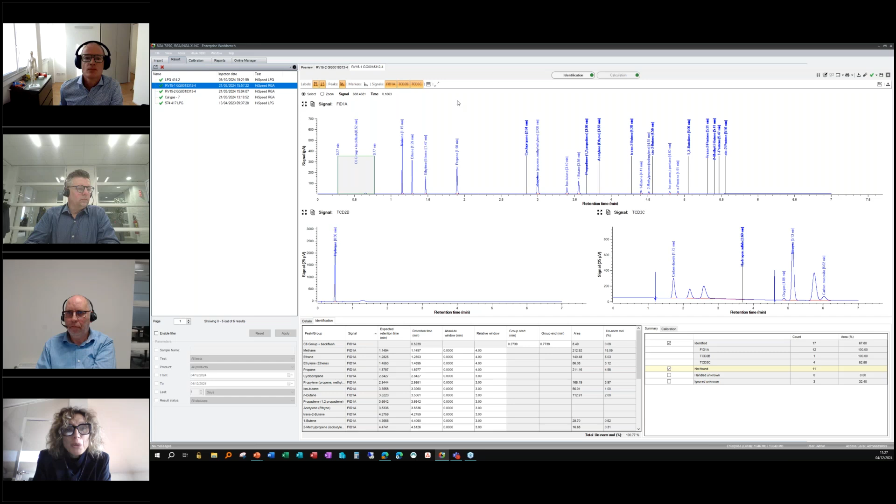No, we have no additional questions. Thank you, Theo, for your presentation. I'm sure it has been very interesting also for our audience, and I guess you will be at their disposal for any questions they might have.